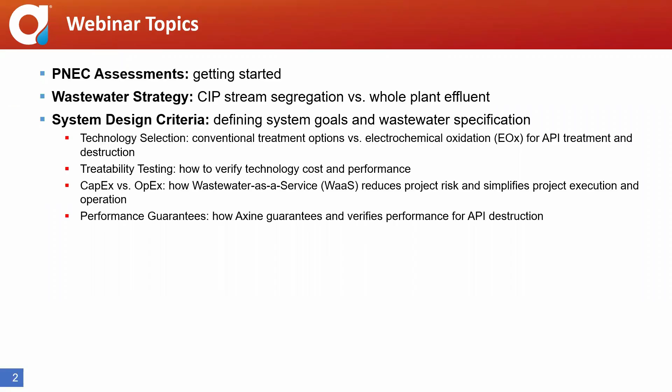So here's what we're going to cover today. Again, it's going to be fast paced. We're not going to go super in depth into all of these, but give you a little bit of everything on what it takes to bring one of these projects to life. We're going to start with PNEC assessments, then move on to wastewater strategy, stream segregation versus whole plant effluent, system design criteria, and everything that feeds up into that—things like technology selection, treatability testing, CapEx versus OpEx strategy, and performance guarantees.

The next few minutes or so might be a little overwhelming for you guys. I'll try not to get too deep into this, but I feel it's really important that we start from the beginning, which is PiE impact assessment.

While only about 2% of pharmaceuticals in the environment is actually attributed to the production of pharmaceuticals, it's in our area of influence. And according to your responses in the pre-webinar survey, 50% of you have PiE or PNEC goals at your site. So this is clearly something that you all are working towards, and we are working towards, of course.

PiE assessments may be facilitated or even carried out by an internal or external subject matter expert—that's not something that Axine does. But I do think a broad understanding of what this entails is really important for anyone on this call so that you know what you're getting into.

Often the driving force of achieving PNEC, or predicted no effect concentration, is coming from corporate ESG commitments, and those commitments are incredibly admirable, but of course they're no easy undertaking.

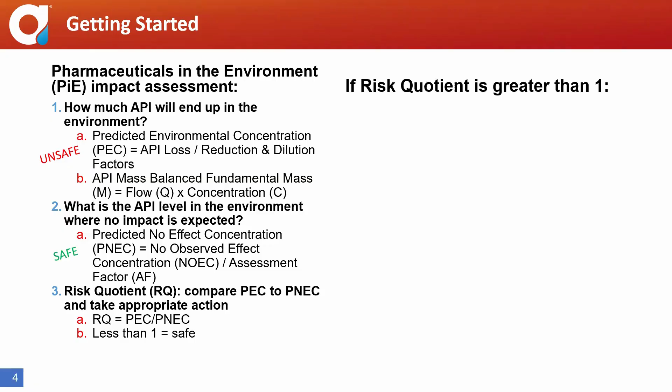So once you've done your PiE impact assessment and you end up with, let's say, an RQ that's greater than 1, what do you do next? You need to reduce your losses to wastewater—things like eliminating discharge, implementing dry cleaning practices. Once you've done this, you would recalculate your RQ again. And if it's still greater than 1, you'll need to collect the wastewater at point of generation and recalculate again.

And if it's still greater than 1, this is where someone like Axine could come in to help, if you want to make modifications or additions to your wastewater treatment plant, or to remove the APIs.

I just want to note that items 1, 2, 3 under PiE impact assessment, and items 1 and 2 under the risk quotient reduction approaches, are not services that Axine offers. We're certainly knowledgeable on this, but we are by no means experts on it. There are some other really great resources out there that you guys can consult, and I'll share those here.

A couple of them - first and foremost, I recommend consulting the PSCI, the Pharmaceutical Supply Chain Initiative. They've got some great archived webinars on these topics. I believe there's 4 parts to that series, and I've linked that here. So when you get a copy of this, the hyperlink should take you directly to where those are located. If you have trouble locating them, let me know.

And some of you may have seen, if you haven't seen, the AMR Industry Alliance just announced yesterday that they've got their antibiotic manufacturing standard. So I've updated that here, there's a link to that. It's hot off the press.

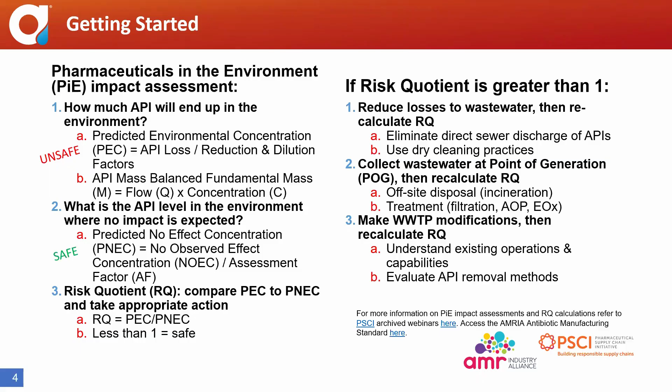And lastly, there's 2 more things. If you've got an internal SME, usually those are at your corporate headquarters - they might be water experts or they might be toxicologists, who knows. They have a lot of different titles, but you usually would have somebody very knowledgeable who can walk you through it. And of course, there are lots of third-party consulting engineering firms that also offer these services. So a lot of ways and a lot of people out there that can help you with this. This is not something that you should take on alone. It is definitely a very involved process.

So moving on to wastewater treatment strategy. We're going to look at an example here of a facility where 2 approaches were considered: whole plant effluent and segregated effluent. Here we're looking at whole plant effluent. Jordan Aders at GBA was kind enough to share some conceptual diagrams of a segregation project, and that's what we see here on the right-hand side of the slide. In this example, the flow rate is about 100,000 gallons per day, or 378 meters cubed per day.

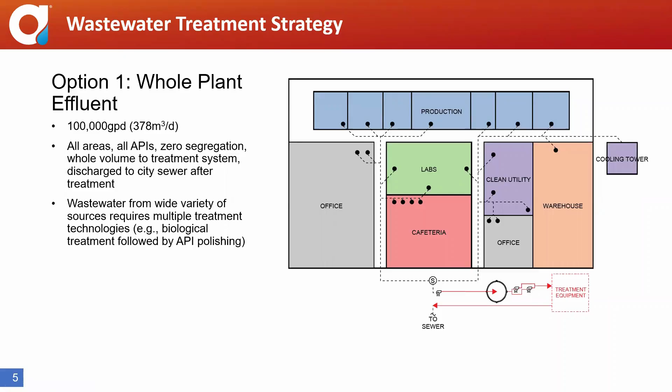As you can see here, we've got black dotted lines coming from production, office, lab, cafeteria - it's coming from bathrooms everywhere, and it's all getting pumped to a treatment system. Because of the large volume, as well as the variety of sources this water is coming from, you would likely need multiple treatment technologies, such as biological treatment and pre-treatment, followed by API polishing to make this happen. In this case, the API polishing could be accomplished with an Axine treatment system.

As an alternative, they've considered a second option, which would be segregating the API. Here you're going to see the black dotted lines again, as before, coming from the office, the labs, the warehouse, cafeteria, etc., going straight to the city sewer, direct discharge. But you'll also see we've got some new red lines here, and those are going to a treatment system. The difference from before to now is that in this case, they're taking the first rinse from production and bringing that to the treatment system, whereas the rest of the areas - office, lab, cafeteria, etc. - go straight to the city sewer. The other difference here is you'll see we've still got these black dotted lines connected to production.

Subsequent rinses have an RQ of less than 1, and so they're able to actually discharge those directly to the city sewer. So we've got rinse 1 going to the treatment system, and subsequent rinses in all other areas of the facility going directly to the sewer. That ends up giving us a reduction of more than 90% to the flow rate - bringing it from about 100,000 gallons per day down to 6,000 gallons per day, or about 23 cubic meters per day. So that's a pretty significant reduction.

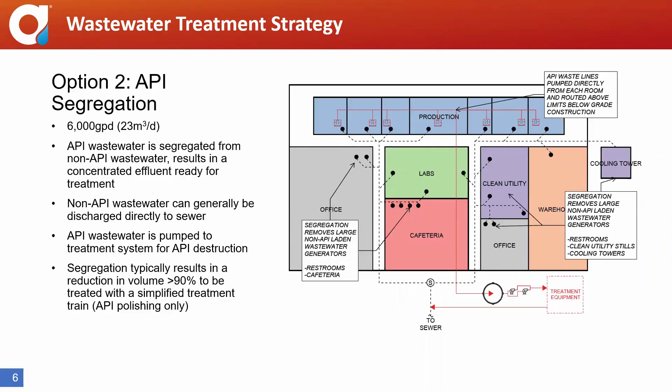So just to summarize that, we'll do a quick side-by-side comparison of these 2 alternatives. If this site would have chosen to treat the whole effluent without any API segregation, it would have resulted in 4 times greater OpEx and CapEx costs, 5 times larger or more system footprint that takes up incredibly valuable space that could be used for revenue generating activities.

This is an uncommon approach. At Axine, we've yet to see a pharma plant choose this approach. By electing to segregate the API contaminated effluent, the site's able to isolate the problem, which is that there's an RQ of greater than 1. They reduce the volume to treat by more than 90% by segregating and isolating that first rinse, resulting in about 75% lower OpEx and CapEx. The treatment system footprint is reduced by 80%, making it a really economic and technically viable approach.

Based on the responses you gave us for the pre-webinar survey, 64% of you have segregated clean-in-place wastewater, so that's fantastic. You're off to a good start because it's a tremendous undertaking to do this, but it's a very important and worthwhile one, as you can see.

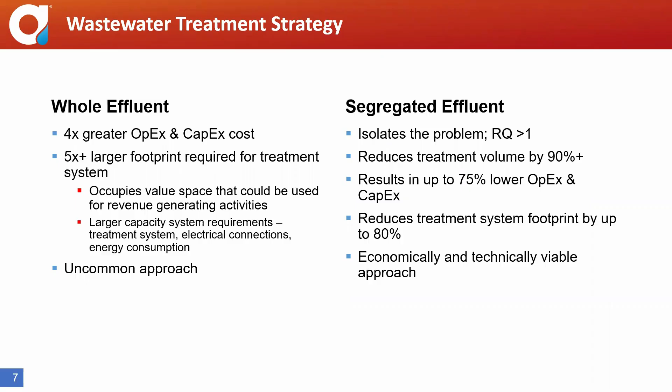Now that we've talked about the different treatment strategies, whole effluent versus segregation, let's talk about treatment options. We're going to review traditional treatment options first, and you'll notice Axine and our technology isn't listed as an option here, because we're not traditional. Rather, we've created a new standard for treatment, and we'll get to that, but for now we'll take a look at these two traditional approaches: separation and destruction.

When I think of separation, I think of it as moving the problem, where you use evaporation, membranes, or activated carbon. All are going to end up having a concentrate or contaminated media that's going to require disposal. So the APIs won't actually have been treated or destroyed, rather they'll be concentrated and collected.

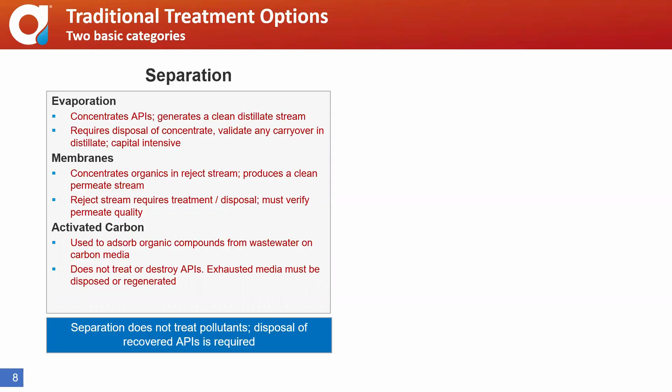In the case of traditional destruction methods, there's of course incineration, which is typically expensive and doesn't align with ESG goals. Other options include AOP, advanced oxidation processes, or biological treatment technologies. In both cases, a deep understanding of oxidation capability and byproducts resulting from the process is required.

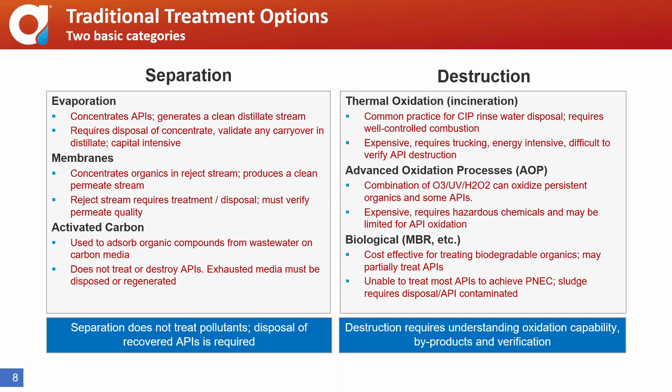Because of time limitations, we're not going to take a deep dive into any of these. But as Chris mentioned earlier, if you want to talk about these, we've got a fantastic, brilliant team of engineers that can help us sort through these and weigh the alternatives with you.

As we discussed, there are currently two common approaches we see in dealing with wastewater at pharma plants: direct discharge and offsite trucking and incineration. Those are by far the two most common things we see happening right now. It's likely because most APIs aren't regulated around the world. People like yourselves, the organizations you work for, and organizations like PSCI and AMR Industry Alliance are really leading the charge in demonstrating good stewardship and good manufacturing practices.

Trucking and incineration pose a lot of risk and create residual environmental issues that don't align with overarching ESG goals. Direct discharge, of course, can result in permit violations, which cause bad PR, are costly, and create risk exposure.

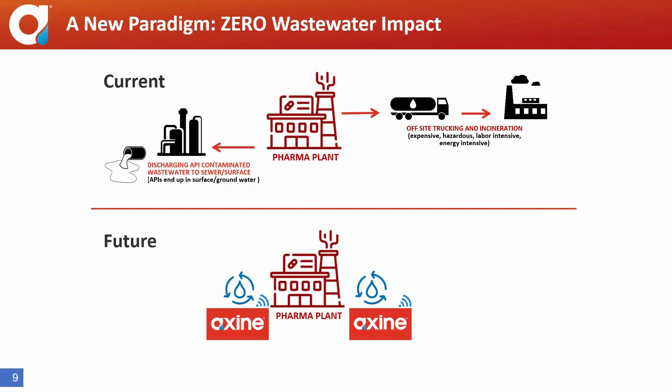Axine has created a new standard for treating persistent organics in industrial wastewater. We aren't moving the problem, we're destroying it on site. We're talking about zero impact, zero liquid discharge, zero APIs going off site.

Now that we've seen some of our traditional treatment options, we're going to dive into our solution, which is electrochemical oxidation. It's a powerful oxidation process that can break the most stable bonds, resulting in a total destruction solution. There's not a lot that do total destruction, as you saw.

This is a simple illustration on the left-hand side showing the oxidation process. It works by applying electrical currents to advanced catalysts, which generate mixed oxidants and hydroxyl radicals. When the water is flowing across the surface of our electrodes, represented by that black line, the pollutants are oxidized both directly and indirectly.

We can completely mineralize and destroy virtually any type of API, solvent, or cleaning solution. We have not seen an organic that we can't treat. We mineralize them back to their basic building blocks: hydrogen, oxygen, nitrogen, carbon dioxide.

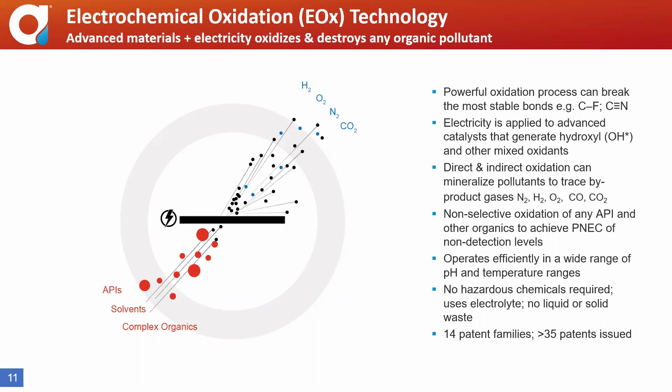We do require an electrolyte for the process to work, which we'll see in a bit with some of our case studies. I should note, with those trace byproducts, they really are trace. We have not seen that any sites we work with have needed to alter any of their air permits with this.

Here we've got an illustration of our standard electrooxidation process. This is at the center of all our systems. Electrodes are packaged into reactors, as you can see in this middle photo, and it's integrated with power supply, controls, and automation software into a modular unit process.

The wastewater is treated in a sequenced batch process. We circulate that water through the reactors, as we talked about on the previous slide, until treatment is achieved. You can see we've got these green dots in the upper left, signifying the monitored data points, things like pH, ORP, temperature, amperage, and so on.

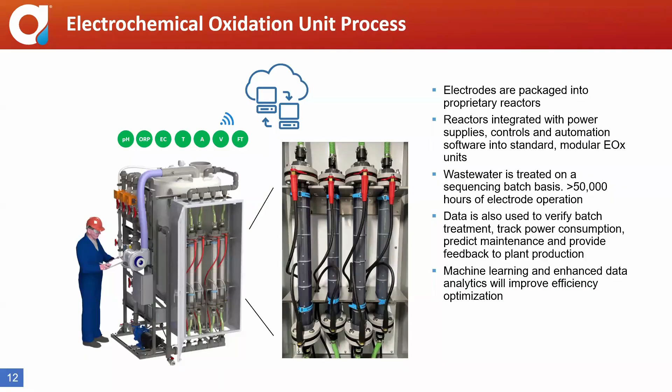Depending on the application requirements, we package our electro-oxidation unit with standard off-the-shelf pre-treatment and post-treatment solutions, providing you with a custom turnkey solution. These can include standard ultrafiltration, pH adjustment, reverse osmosis, and whatever else would be needed as complementary treatment systems, depending on what your treatment goals are.

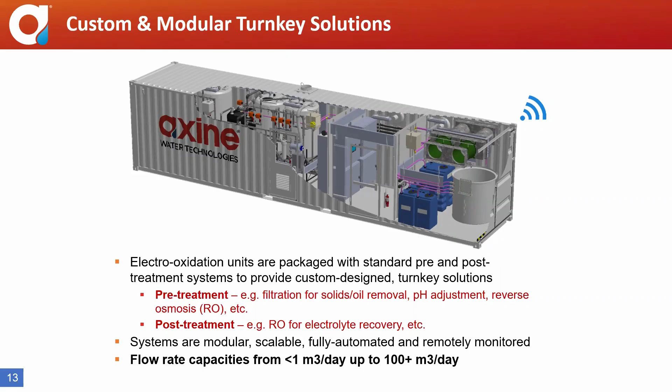We build those systems in our production facility in Vancouver and ship them to the site for installation. These can be skid mounted or containerized, as you see in that illustration on the slide. Everything is modular, scalable, automated, and remotely monitored 24/7 by our team.

Let's talk about treatability testing. This part of our project development process is really important, not just for Axine's technology but for any technology or solution out there. If you're going to attempt to treat, concentrate, or evaporate this wastewater, you must do treatability testing because you need to be certain that it will work. This is a very important step, part of all of our project development processes, along with piloting as the two alternatives to accomplish this.

So treatability testing is done to verify the preliminary estimates and obtain data required for final system design. This shows us any discrepancies in the wastewater. We can identify if any additional pre or post treatment is required and determine any organics mass removal required in order to achieve the treatment objectives and guarantee performance.

Typically this testing is done at our lab in Vancouver. Occasionally testing would be done by piloting on site. The reason we would do that would be for situations where contaminants are degrading rapidly, so they might not be representative by the time they arrive at our facility, or maybe it's a controlled substance. In that case, piloting would be a more appropriate approach.

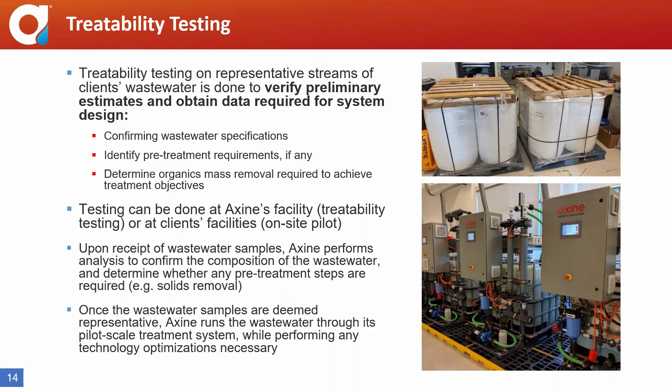We sample throughout the treatment runs to evaluate compositional changes during the treatment. This helps us determine how much treatment time and how much organic mass removal is required to reach treatment objectives. Those treatment objectives could be overall organic mass removal, API removal, passing a whole effluent toxicity test. It could be any or all of those.

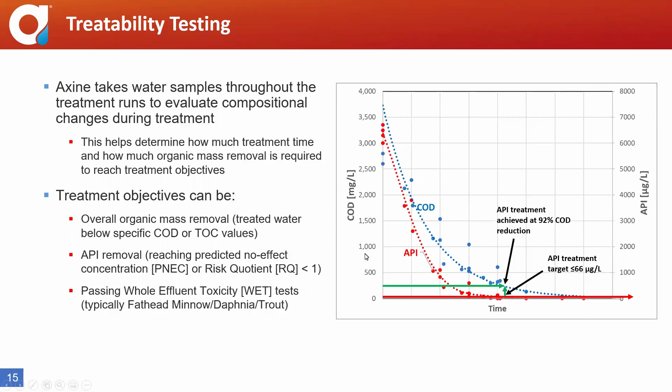You can see over the runtime how we are reducing and removing both the COD and the APIs from the wastewater. We hit our target here of 66 micrograms per liter of API at the same time that we've removed 92% of COD. So COD removal and API removal come hand in hand here.

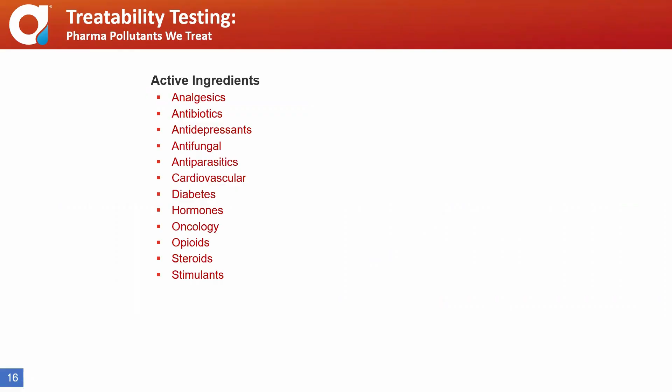Here we've got a list of some of the pharma pollutants we can treat, such as antibiotics and antiparasitics, hormones, opioids. This is by no means an exhaustive list, but it gives you an idea of the range and scope of our technology.

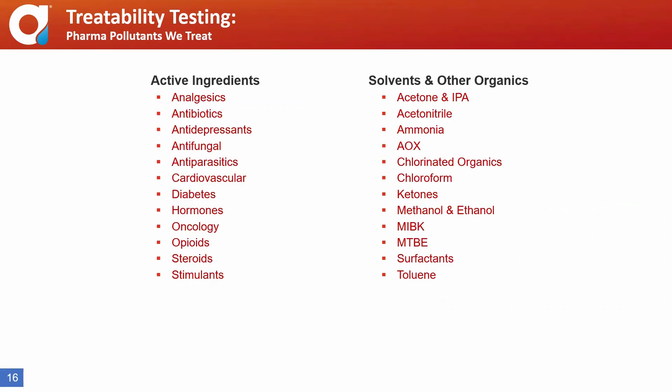And here we've got some solvents and other organics that we can treat, so acetone and IPA is a really common one, methanol, surfactants. The bottom line is we've got a unique capability and know-how to treat and destroy virtually any API and other organic to non-detection without limitation.

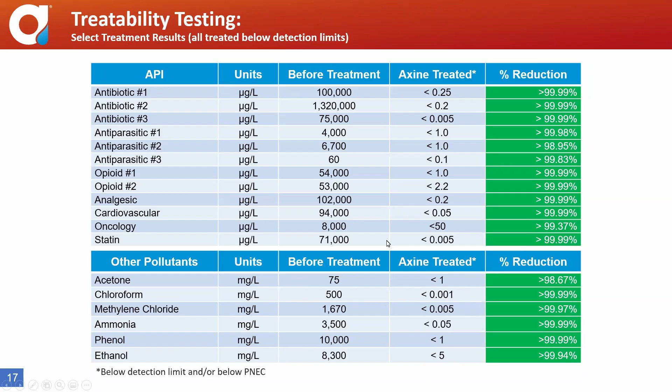And then here we've got different pollutants, like we said earlier, acetone, chloroform, ammonia. Again here the unit of measure is milligrams per liter. We've got the concentration before treatment, the concentration after treatment, and the percent reduction. So again, high removal in all these cases.

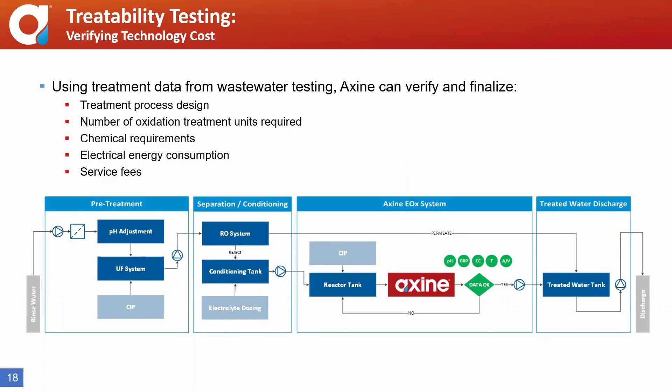So using that treatment data from the treatability testing, we can then verify and finalize treatment process design, the number of oxidation treatment units required, chemical requirements, electrical consumption, and service fees.

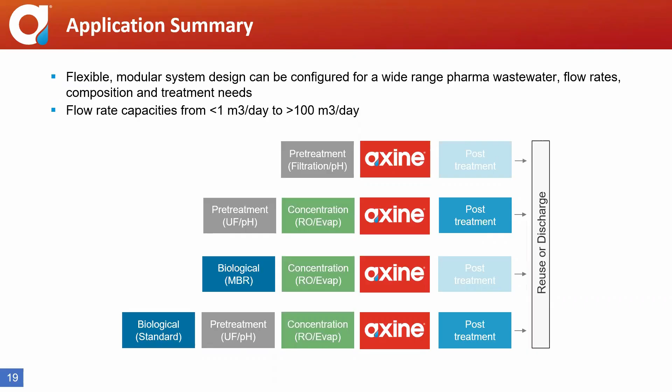So as we discussed earlier, we've got biological treatment with pre-treatment, ultrafiltration, pH adjustment, reverse osmosis, evaporation, etc., prior to an Axine system, and then post-treatment. And so it really, depending on what your wastewater characterization is, what existing treatment systems you have in place, will determine what your proposal looks like here.

We'll dive into CapEx and OpEx comparison shortly, but I think it's really important first that we have a little context on this WaaS model. So WaaS is short for Wastewater Treatment as a Service. And how does it work?

We work really closely with our customers to develop design specifications. We do this preliminary design prior to treatability testing, as we just saw, and then final design comes after that. We design, build, finance, install, and operate the system. That gives you full performance guarantee for the duration of the service contract. It gives you low project and technology risk. It includes all service and maintenance. There's minimal capital investment. It's an incredibly cost-effective option.

So essentially, to break it down and really simplify it, you're going to give Axine the wastewater to our system, and we're going to deliver it treated to your wastewater specification. And that's all you have to do.

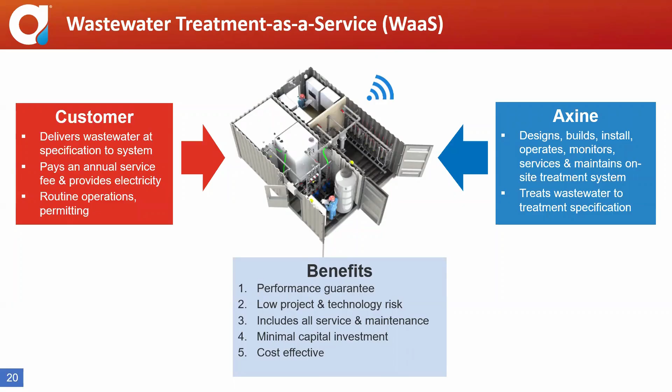This cost question comes up a lot. We did the same presentation at another webinar last week. We offered 2 times for folks, and the cost question came up a lot.

So what I'll tell you about the cost of the Axine system is that it varies tremendously, as we saw in those last 2 slides. There's a lot of variables that go into it. The flow, the COD, the water quality, down to hardness, and all of those things are going to determine what unit processes need to be part of the Axine system. And then of course the flow is really going to impact how big it is, right?

So it really runs the gamut. It could be pennies a gallon, up to a dollar a gallon, and it really runs the gamut. So that's something I would encourage you, if you really have burning questions about costs, to reach out to Laurent or I, and we can look at that on a case-by-case basis. And our proposal process is very quick.

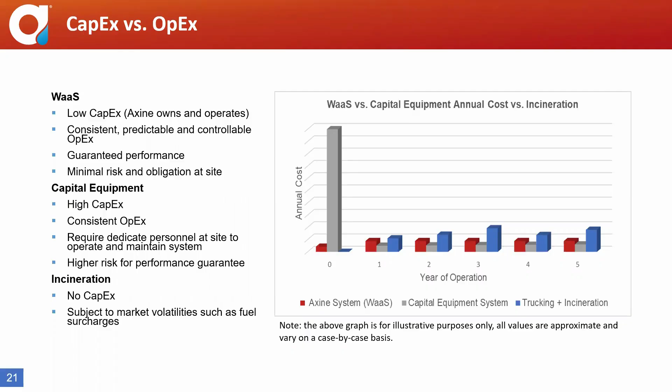And lastly, with incineration, it doesn't require any CapEx, and there's no dedicated site personnel required, but it is subject to market volatilities. We were just talking about gas prices before the call this morning and how they're just going out of control. And then, of course, it doesn't typically align with ESG initiatives.

So we're going to move on to performance guarantees. I think the best way to demonstrate this is with some real world case studies. We've got a number of examples, but for time's sake, I'm just going to go over 2. Of course, the offer stands if you want to know more.

If you're like, hey, have you ever treated XYZ, just reach out to Laurent or I, and we're happy to share our experience with a variety of things, not limited just to this. But again, it's a short webinar today, so we're going to keep it brief. This first case study is a great example of how we've helped sites eliminate offsite trucking and incineration of waste rinse water. In the second case study, we'll look at a site whose goal was to meet PNEC.

We'll start with a little background on this site. It's an antiparasitic formulation plant for animal health, and it generates about 4,000 gallons per week, or 15 cubic meters per week. The API is ecotoxic and exceeds the discharge permit with the local municipal treatment facility. As a result, this wastewater was historically trucked off site, but the site was experiencing frequent disruptions in service, and cost escalations combined with that prompted a search for on-site treatment solutions.

Over several months, we worked with the site to develop the project, starting with an assessment of the production process, wastewater composition, permit requirements, sampling and treatability, and then the final system design. This resulted in the signing of a master service agreement. From there, we designed, built, and installed the system that we're now operating. And I should mention, this all happened during the pandemic, at the beginning of the pandemic, when the world was shutting down.

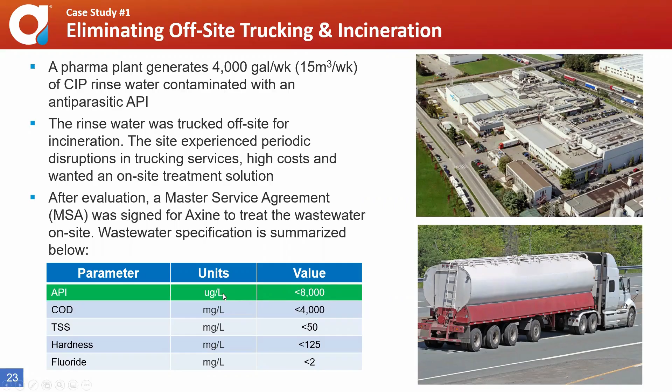You can see here in the table on the bottom left-hand side, the influent wastewater specification. Worth noting, API about 8,000 micrograms per liter, COD at about 4,000 milligrams per liter.

As we saw earlier, we do treatability testing to verify treatment performance and provide us with key data for our final system design. In this case, that goal was to reduce the APIs from the max concentration of 8,000 micrograms per liter down to about 66 micrograms per liter, so more than 99% reduction.

The customer shipped us 7 drums of rinse water in those 55-gallon drums, as we saw earlier when we talked about treatability testing. For that treatability testing, in addition, a wet test was required by the local municipality.

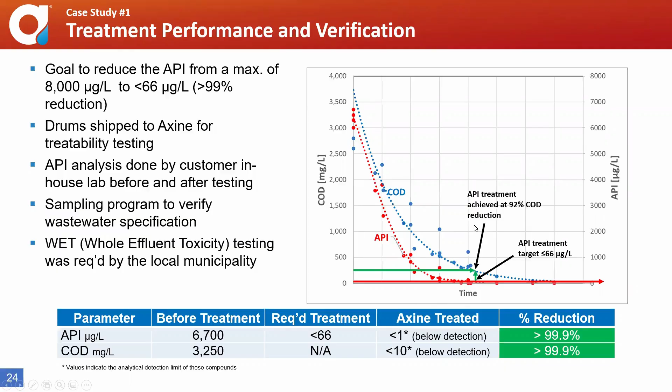As you can see, we achieved that 66 micrograms per liter target on the API treatment when we removed 92% of the COD. And here are the results here as well.

First, we've got the conditioning step. We use equalization tanks, so there's an equalization tank ahead of this. A batch is pulled into the tank for conditioning, and an electrolyte such as sodium sulfate is added. Then from there, it goes to the Axine electrochemical unit—we transfer the batch to our reactor tank, and it goes through the electrochemical reactors to oxidize and destroy the API.

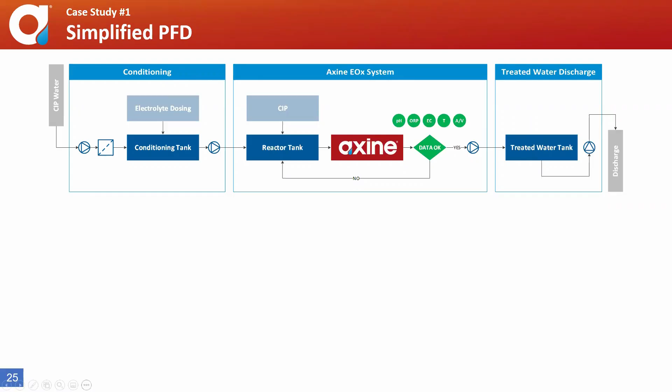I know that when we talk with a lot of sites, they ask us, how do we handle this variability? It's incredibly normal to have this amount of variability. You guys are running a lot of different APIs through your production facility, and that subsequently comes into our treatment system. So we've got to be ready to handle a lot of different things.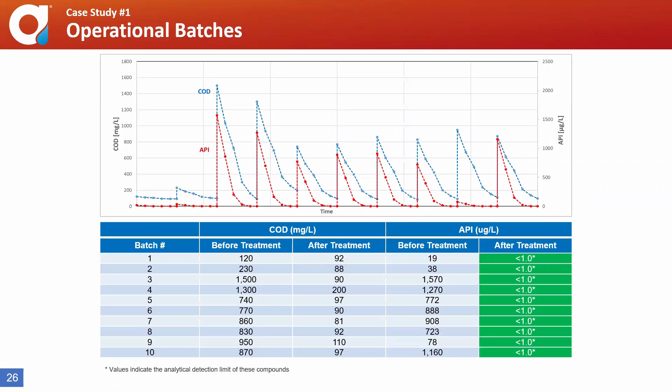We achieved this by first developing a realistic wastewater specification. Next, we use that to design a system with sufficient headroom and spare capacity. And finally, we use that equalization tank on the front end to be able to manage any peaks and valleys of either concentration or just flow.

The bottom line is we've been able to successfully achieve the site's primary objective of eliminating the risk of production bottlenecks due to off-site trucking. We've also reduced operating costs, streamlined their waste operations, and reduced greenhouse gas emissions, which we'll look at in a moment. One thing that was really important to this customer was the capital efficiency of our service model—it meant very minimal CapEx investment for them, which was a tremendous win.

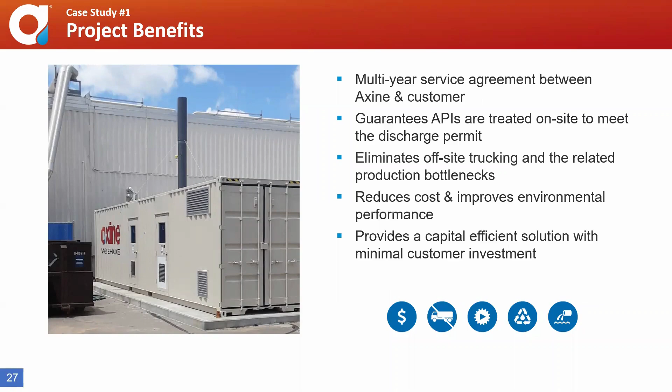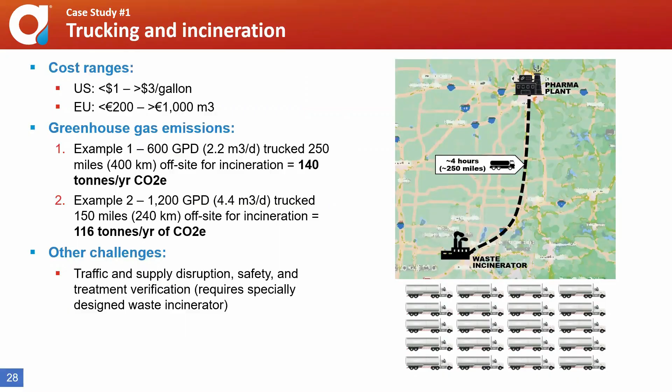So one last thing before we finish this particular case study. We've talked about trucking and incineration—it's not only very expensive, but many of your companies have specific targets to reduce greenhouse gas emissions, and this just doesn't really align with ESG commitments. We've found that typically rinse streams trucked off-site generate between 100 to 200 tons per year that can be displaced with an on-site treatment system such as ours.

We'll move on to case study number 2. As I said, the objective at this site was to achieve API destruction to achieve PNEC. This case study demonstrates how we used membrane technology to concentrate the API before electrochemical oxidation to achieve that PNEC in the receiving water.

The background is there's a new production line at a formulation plant that manufactures animal health products to treat and prevent disease and parasitic infections in companion animals. This new line generates about 5,000 gallons per day, or 19 cubic meters per day, of rinse water contaminated with the antimicrobial API. The API is not regulated, but the company wants to achieve PNEC of 3 parts per billion in the receiving water.

That's an interesting thing. If you're in Europe, you might be scratching your head on this. There's a lot of places in the world that don't regulate antiparasitics and their discharge. In Europe, it's very common. Where this particular facility is located, it is not. So this customer is going above and beyond because they recognize it's harmful for the environment, and they're committed to treating it.

So we collaborated with this customer to develop the project. We signed a master service agreement for Axine to treat the wastewater under a multi-year service agreement.

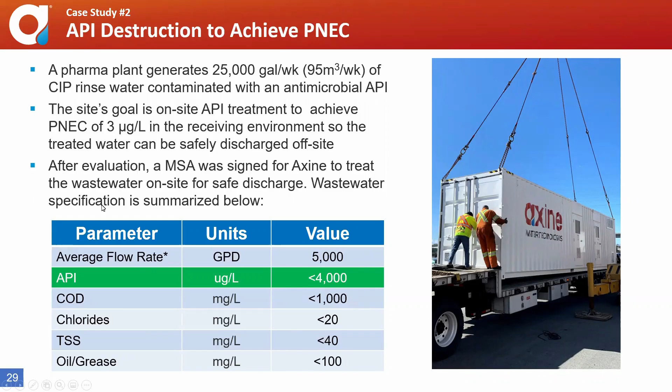Again, we conducted treatability testing before we went ahead and did the final design of the system. The goal here was to reduce the API from 4,000 micrograms per liter down to about 300 micrograms per liter, or 3 parts per billion PNEC in the receiving water. There are dilution factors in play here that we have to take into consideration.

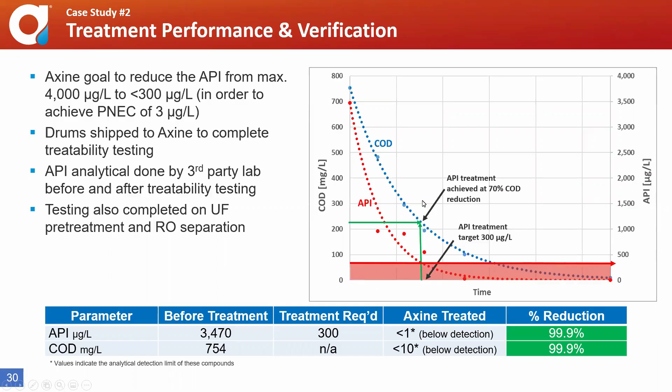You can see in the chart and table that we were able to achieve target treatment with about 70% COD reduction. Just a reminder, we've got COD on the left-hand side in milligrams per liter, APIs on the right in micrograms per liter, and the run time on the x-axis. The API target treatment of 300 micrograms per liter was achieved here, and COD was about 70% reduction.

As you can see, the design here is pretty different from the previous case study. In this system we've got 4 steps. First we've got pre-treatment, where we have pH adjustment and ultrafiltration, and that ultrafiltration is to remove the fats, oils, and greases.

It's then transferred to separation and conditioning, where we've got an RO system where the APIs are concentrated into a reject stream. That reject is then treated by the Axine system, and then it goes to the treated water tank for verification and discharge. The RO clean permeate is also transferred to the treated water tank for discharge, so we've got the reject going here and the permeate coming across directly to that treated water tank.

So again, I talked about ultrafiltration. We'll talk about the RO now. Why did we use RO here? We used it to concentrate the APIs into a reject. This allows us to treat a higher concentration and a lower volume, which substantially improves the efficiency and reduces the cost for the system.

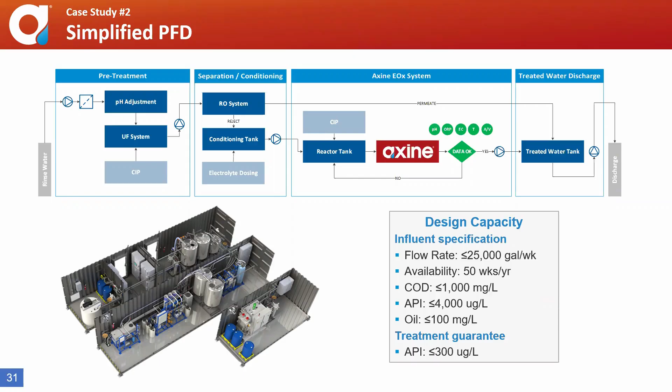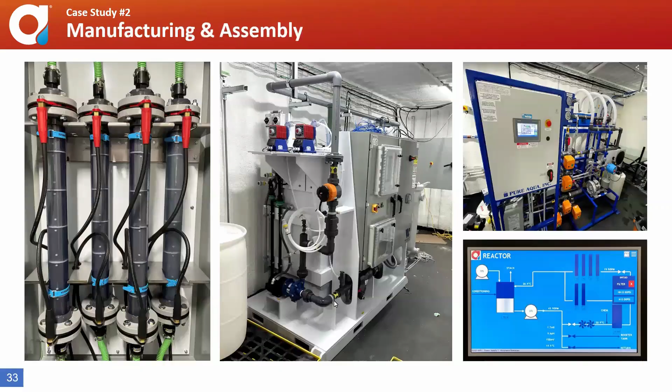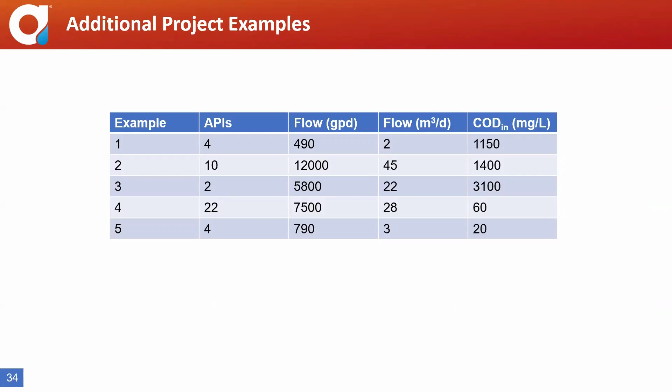We're pressed for time, but I just want to show a few additional examples of projects we're actively working on. I know many of you want to see how many APIs we're treating, what the flow rate is, how much their COD is. Here's just a few examples — again, we're pressed for time, so I'm not going to go over this in detail, but you'll have a copy of this.

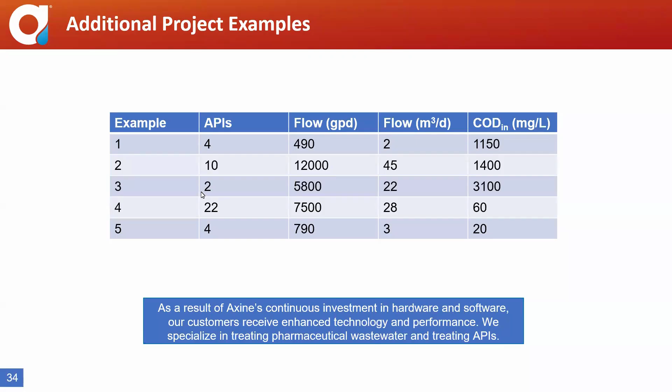As a result of Axine's continuous investment in hardware and software, our customers are receiving enhanced technology and performance. We're specializing in treating pharmaceutical wastewater and treating APIs. You see here there's 22 APIs — that is not a problem for us.